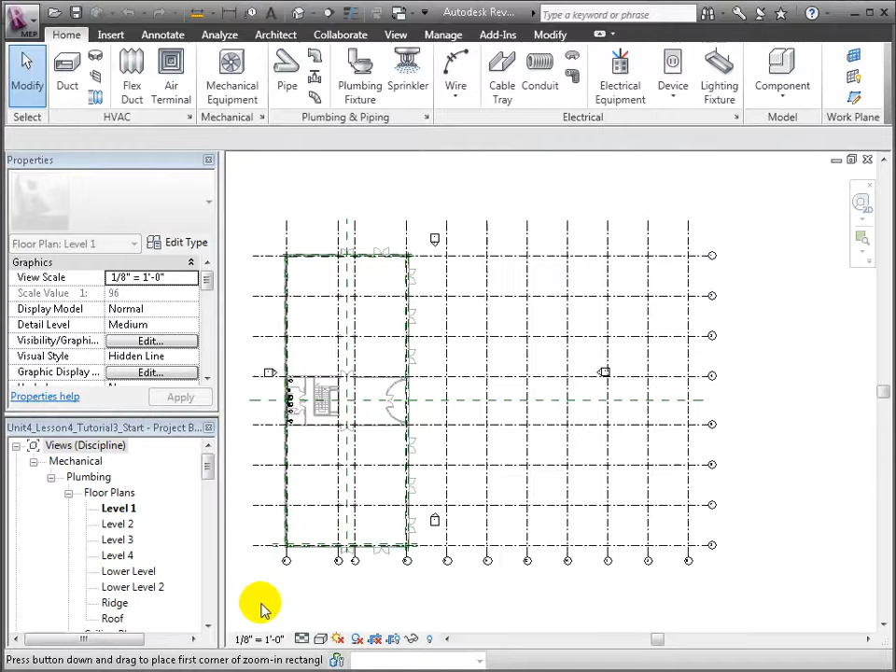Let's open the Level 1 floor plan in the plumbing section of the browser and zoom into the restrooms. Let's similarly zoom into the fixtures in the 3D view and orient them to look at the connection sides. Use the WT shortcut to tile the views.

Notice again the wet wall where we will be locating the vertical riser pipe for the sanitary system. Now open the Pipe tool in the Home tab. Let's choose a 4-inch diameter in the option bar.

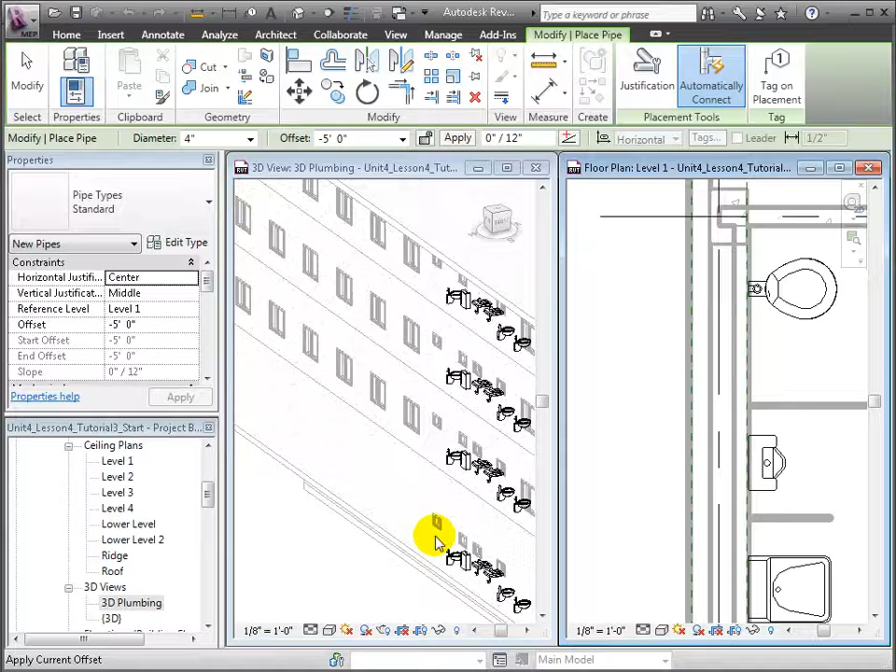To place a vertical riser, we first set the offset for the lower point of the pipe at -5 feet from level 1 and click Apply. The Properties palette confirms a reference level, which currently is level 1.

Now click in the 3D view to set the approximate desired location of the pipe, and return to the offset, now setting it to 45 feet, and click Apply. Now the vertical pipe appears between those two elevations.

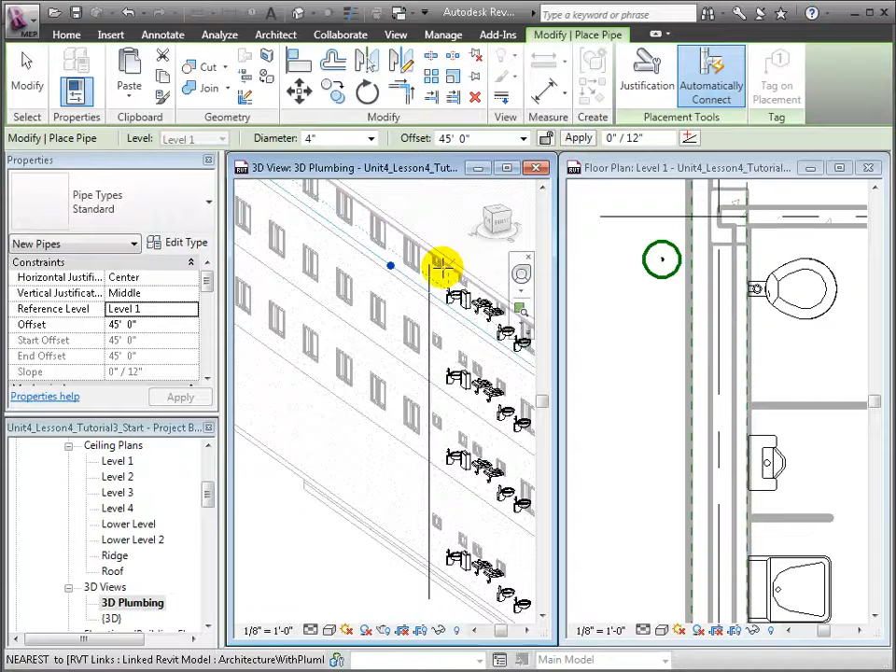Use Escape to cancel out of the Pipe tool. Now we can select the pipe so that it appears in the Level 1 plan view. Let's change the detail level to Fine so that we view the accurate diameter of this pipe, which we will now place right within the wet wall.

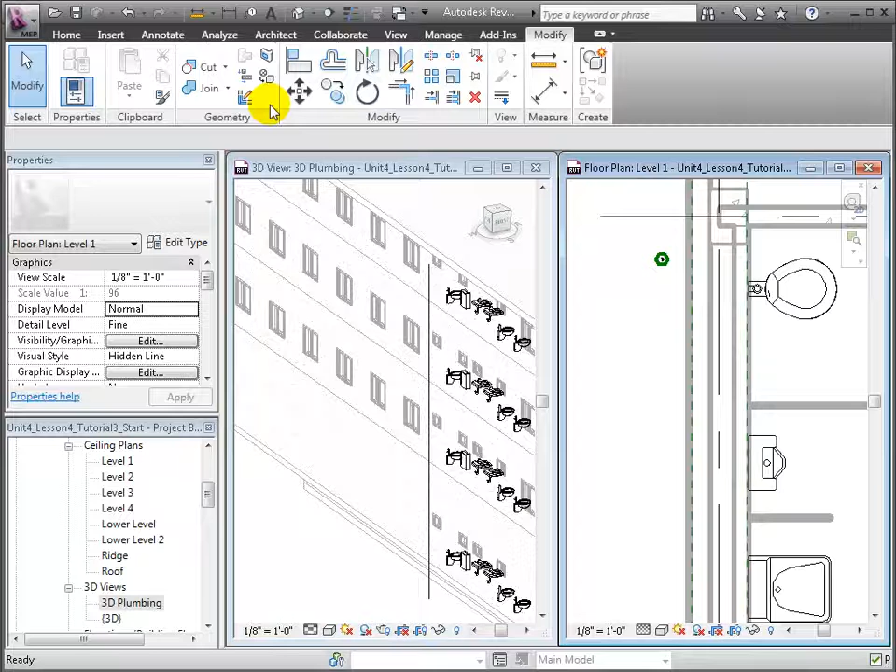From the Modify tab, use the Move tool. First, click on the center point of the pipe, and then again on the new desired location at the center of the wet wall.

And there it is, centered within the wet wall.

The next step is to place the horizontal branch pipe into which all the sanitary fixtures will drain before connecting to the vertical riser. Again, open the Pipe tool, and this time we'll set the offset as -1 foot from level 1. All sanitary pipes slope, so we will apply a 1/2 inch over 12-inch slope and choose this to be negative to indicate a downward slope from the starting point.

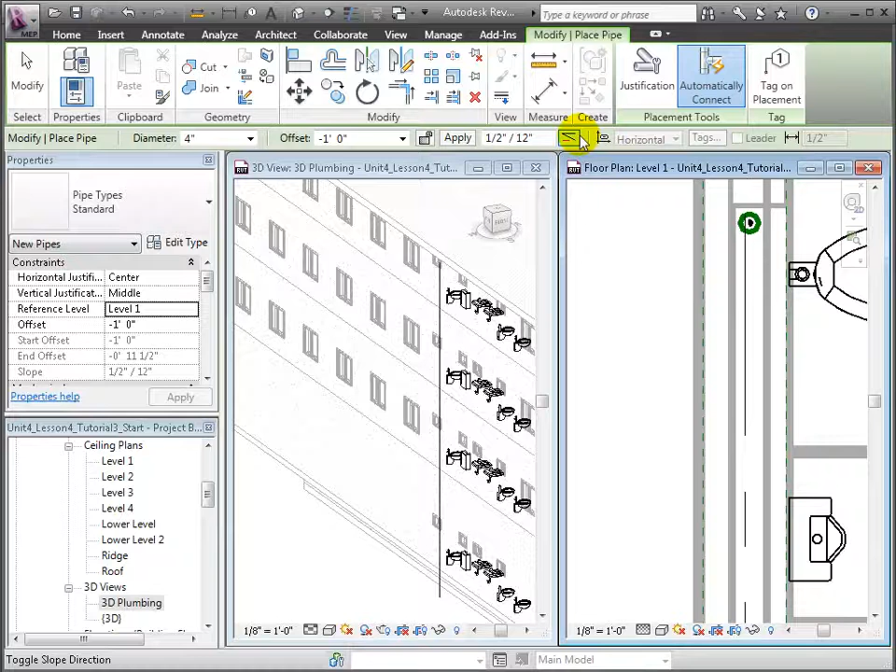From the Level 1 floor plan, begin drawing the pipe by clicking in the center of the south end of the wet wall and dragging the pipe to a small distance before the vertical riser. Click a second time to finish drawing the pipe.

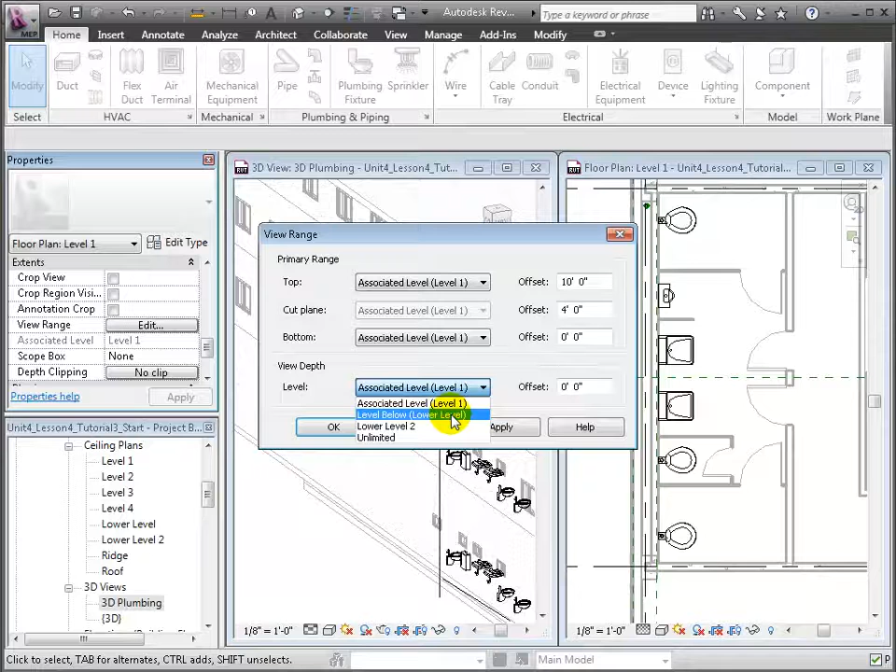We'll need to adjust the view settings in order to see this pipe, which is now underneath the floor. Navigate to the View range in the Properties palette and click Edit. Let's change the view depth to reach the level below and click OK. Now the horizontal pipe appears.

When we select the pipe, we'll see grips indicated by the blue crosses. We can extend or shorten the pipe by dragging these grips.

Let's return to the 3D view, where we can view the results of our new horizontal branch pipe, which slopes downward toward the vertical riser.

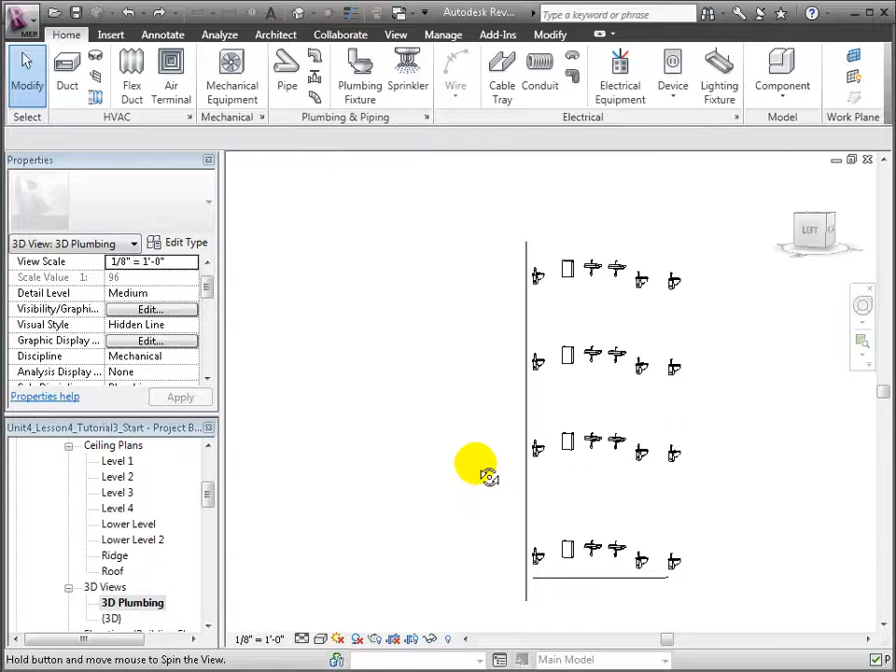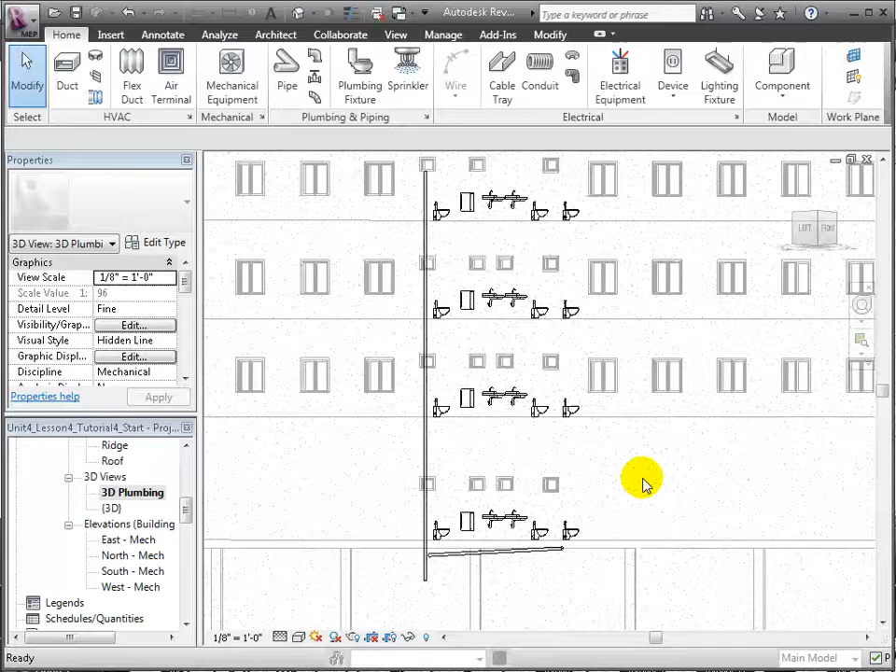Next, we will join these two pipes and then connect each Level 1 plumbing fixture into the horizontal branch pipe. Let's start by preparing our 3D view using VG, Visibility Graphics, to turn off the linked model. Use the ZR Zoom shortcut and drag select the region of the horizontal branch.

Select the horizontal branch pipe so that it's highlighted and showing its grips. When your mouse is over the left grip, press the left mouse button and drag the mouse while holding down the Shift key until the cursor is hovering over the vertical riser and it is highlighted.

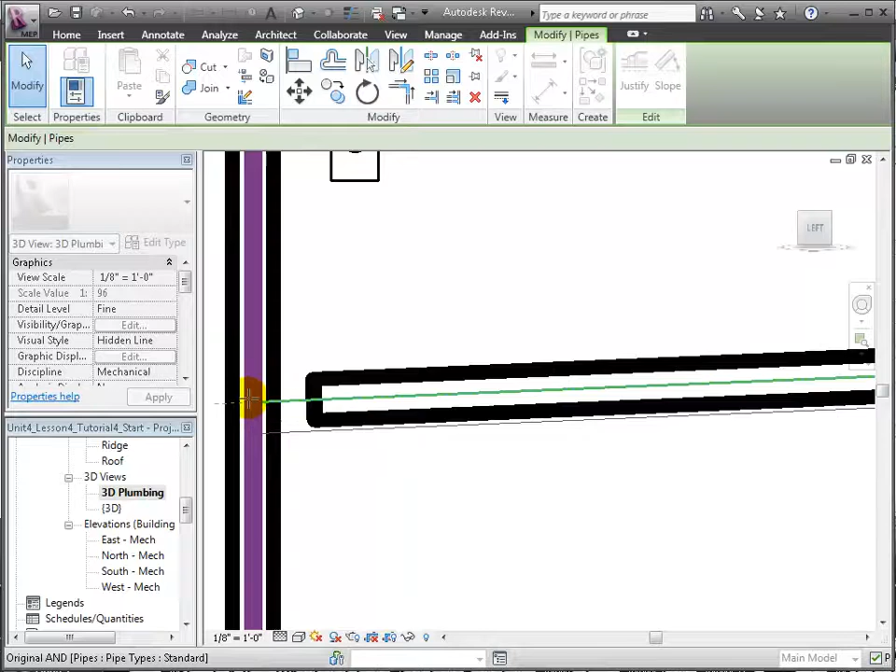Now release the mouse button and we will see how Revit MEP automatically generates the T-fittings necessary to join those pipes. Let's view it with the Shaded with Edges visual style.

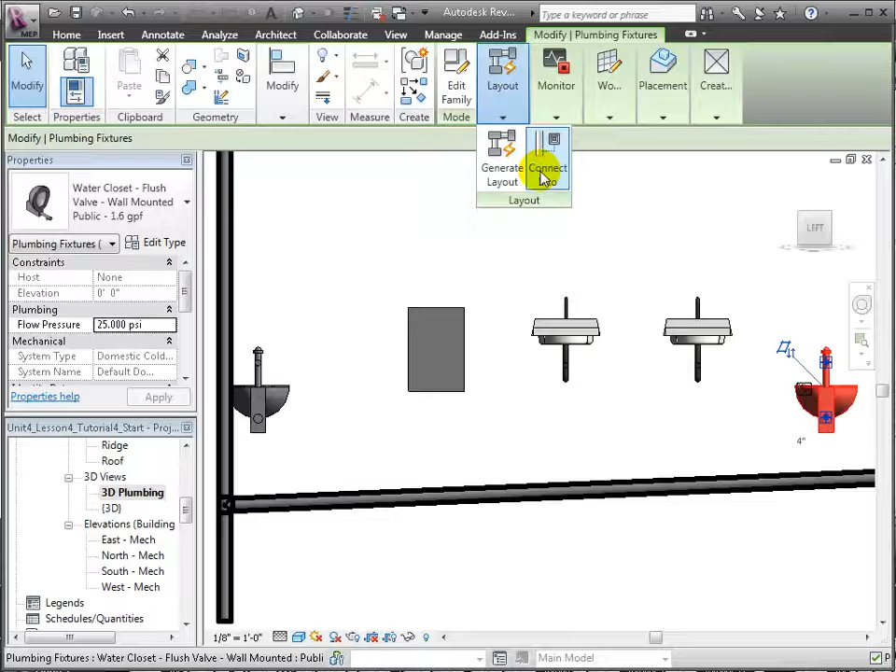Finally, we are ready to connect each fixture into the branch pipe. We'll do this by selecting each fixture individually and then choosing the Connect Into tool from the Layout menu of the Modify Plumbing Fixtures tab.

A dialog appears asking us to choose which connector of the fixture to tie into. We will choose the sanitary connector. Click OK, and finally select the branch pipe to indicate the tie-in location. Revit auto-routes pipe and fittings to make that connection.

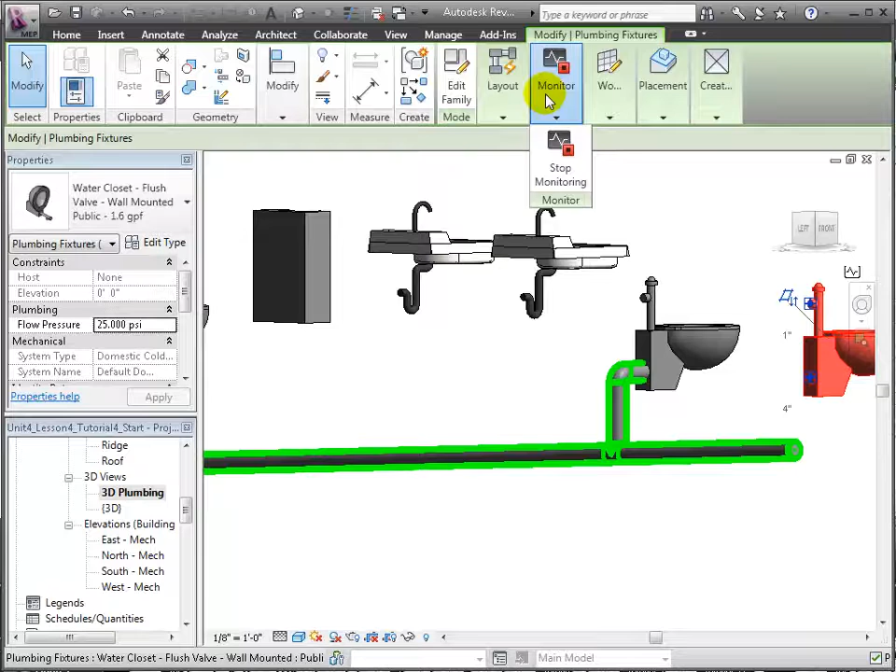We can continue one by one through the fixtures until we are finished. Since all these fixtures are being connected by their sanitary connector, Revit is recognizing that this pipe system is a sanitary type system, and therefore using the green color display filter associated with the sanitary system.

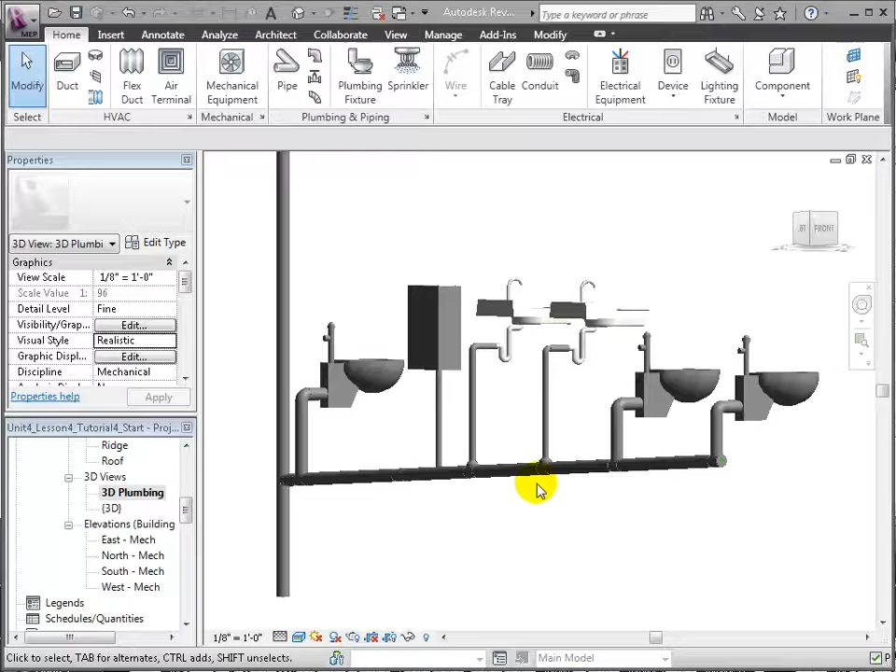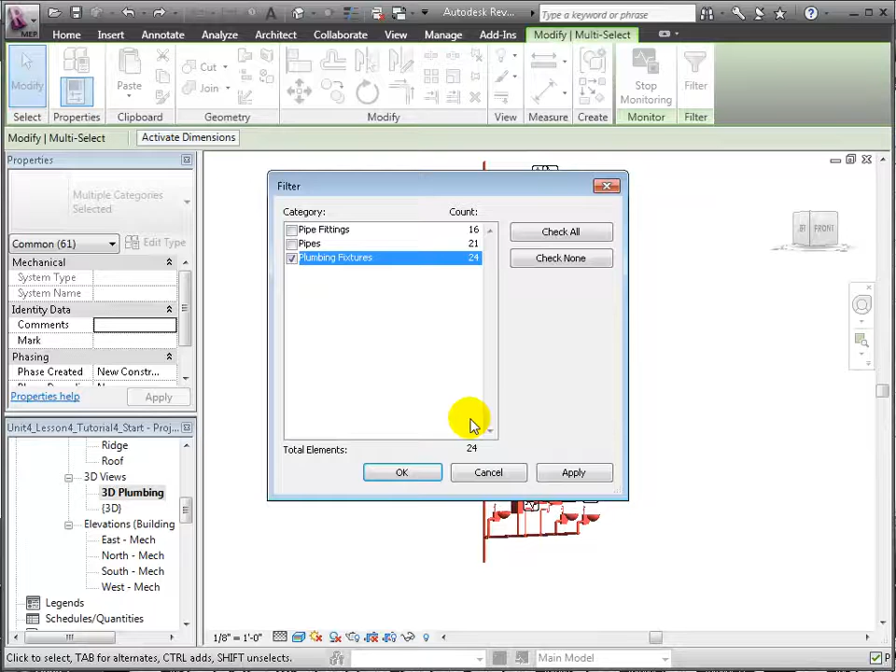Lastly, we can assign all the plumbing fixtures to a system. Do a drag select of all the fixtures and filter out the pipes and pipe fittings. We use the Create System tool and select Sanitary in order to define a sanitary system.

Switch to the View tab, then open the User Interface drop-down to turn on the System Browser view. This will activate this new view window at the bottom of the drawing space. Let's expand the piping section and the Sanitary System 1, and we'll see all the fixtures in this newly defined system.